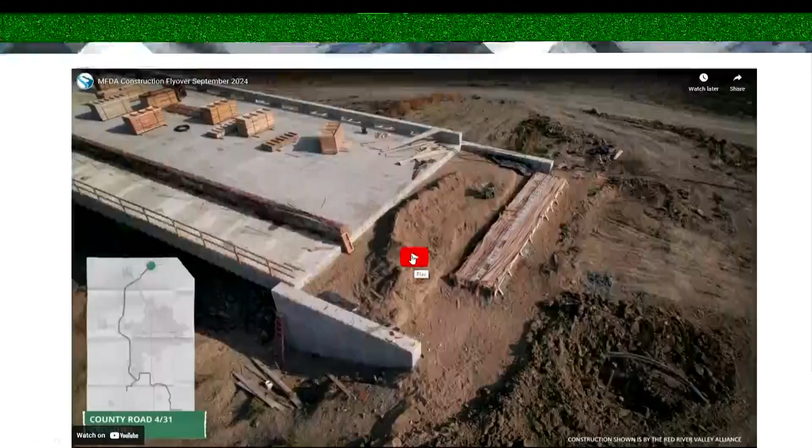One of the items we do on a monthly basis for our board presentation is a quick drone video update that gives a few-minute overview of the highlights of construction for the last month. Mayor, I hope you don't mind, but this is actually the presentation we'll show you guys tomorrow at our board meeting, so it's hot off the presses. This will be the first viewing of our drone update for September, giving a snapshot of some of the construction that's happened in the last month.

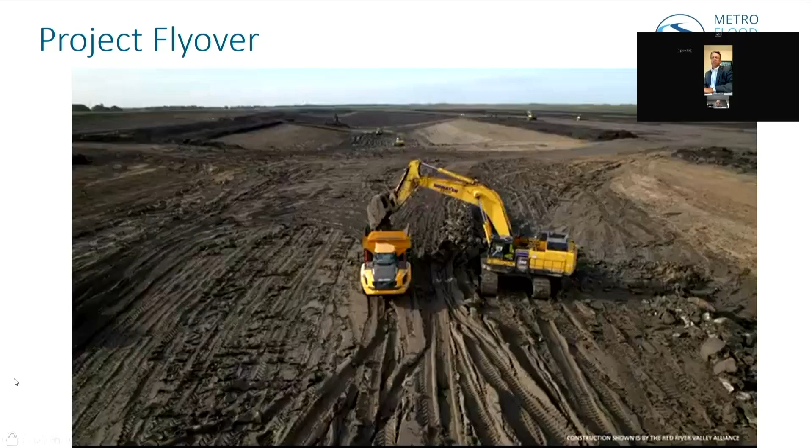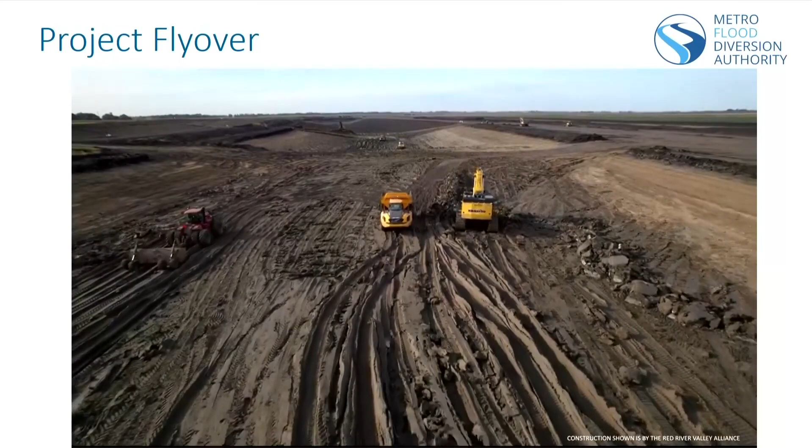Hi, I'm Tom Fuchs, the Senior Construction Manager for the Metro Flood Diversion Authority, with this month's project update. ASN Constructors' teams have continued to dig down to excavate the stormwater diversion channel while building up to construct the bridges that will cross over it.

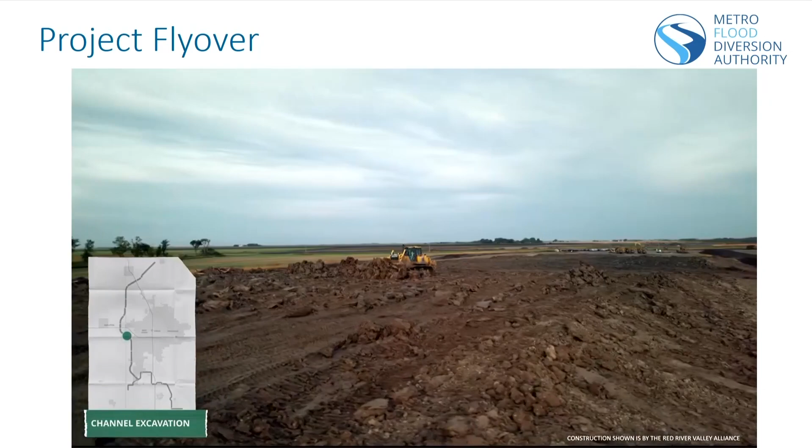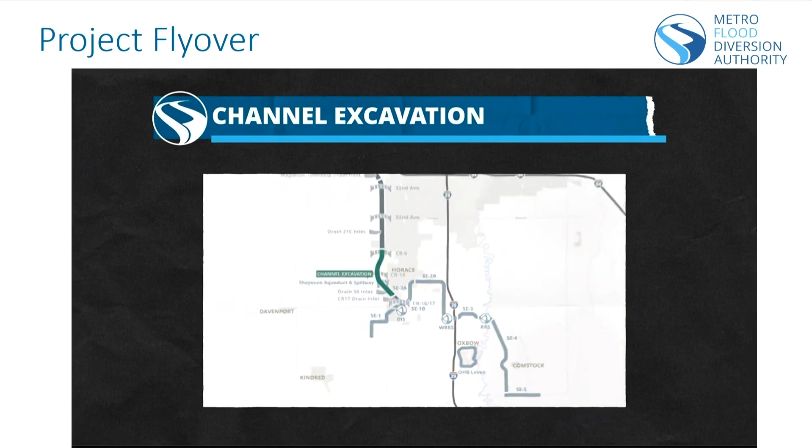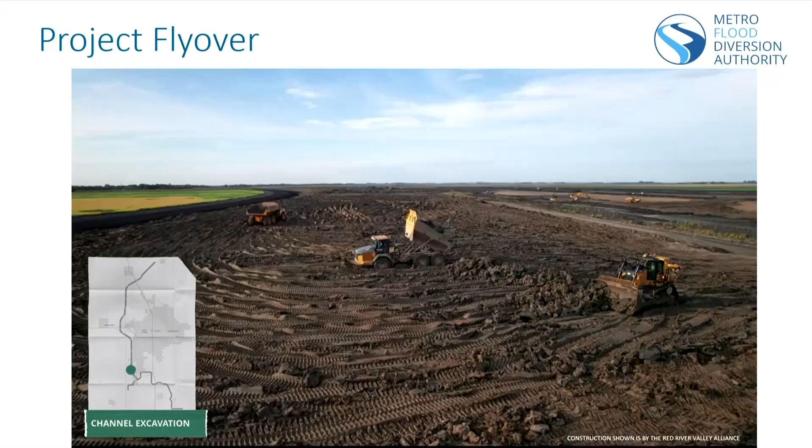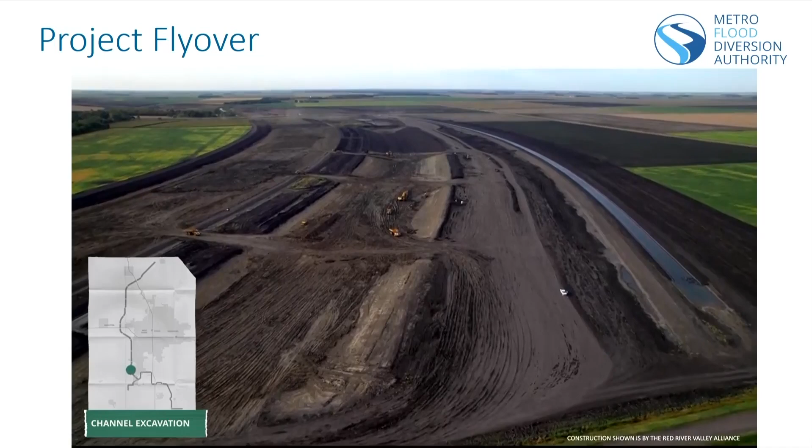In Reach 10, just south of I-94, crews are placing excavated material for the non-embedded levee, which must be constructed in warmer weather. Levee construction is also the focus in Reaches 11 and 12, further south. In Reach 13 of the channel, south and west of Horace, North Dakota, crews are digging the main channel and placing the excavated material berms on both sides. Close to another 2 million cubic yards of the necessary 45 million were moved in the past month, bringing channel excavation to about 57% completion.

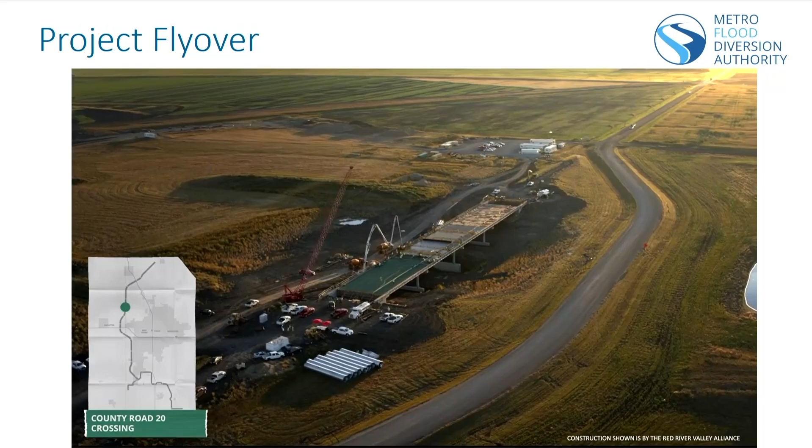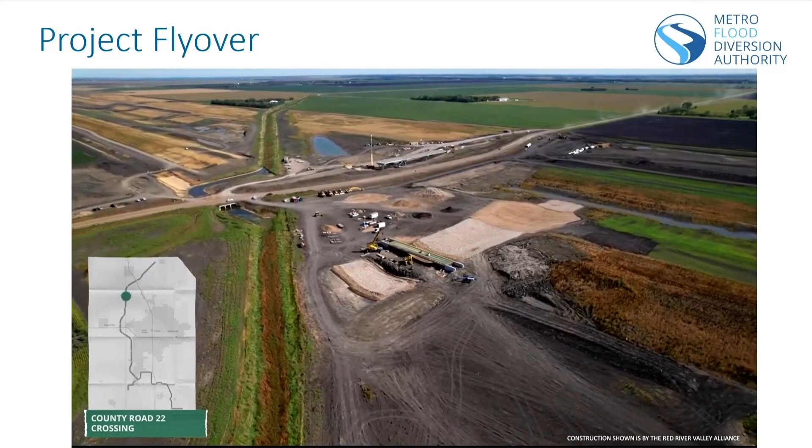Work also continues on many of the 19 channel crossings. At County Road 20, ASN Constructors started early to pour approximately 700 cubic yards of concrete needed for the bridge deck. North of there, at the County Road 22 crossing, bridge girders are now installed. Our drone view also captures nearby progress on the Maintenance Road Bridge crossing the lower Rush River inlet to the channel, which is one of several river and drain inlets under construction.

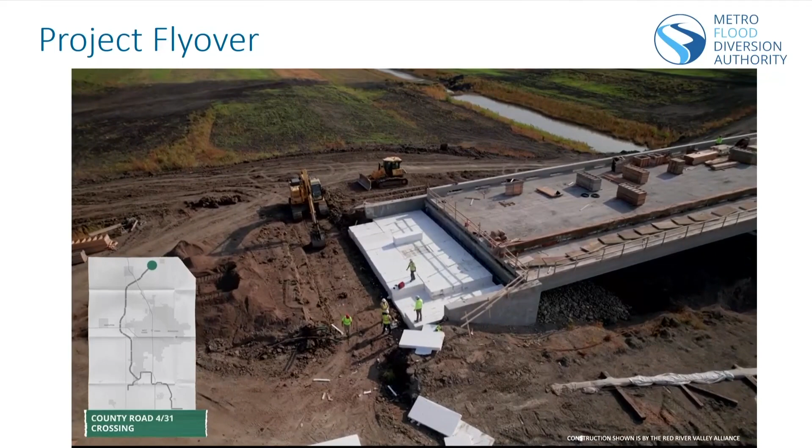Northeast of Argusville, North Dakota, near the diversion outlet, ASN Constructors is working toward completion of the combined County Road 4 and 31 crossing. Crews have now backfilled both abutments, including installing geofoam, a lightweight fill material that mitigates settlement, and they are beginning to construct the concrete approach slabs. Concrete bridge railings are also underway atop the bridge deck, which was placed last month. The new crossing is expected to open to traffic later this fall.

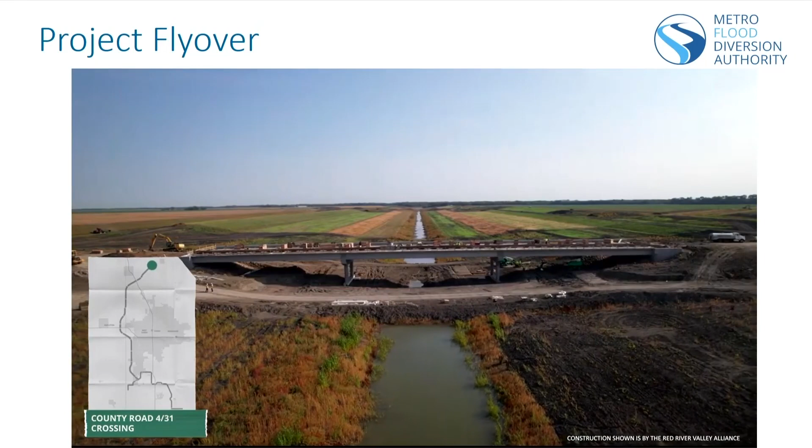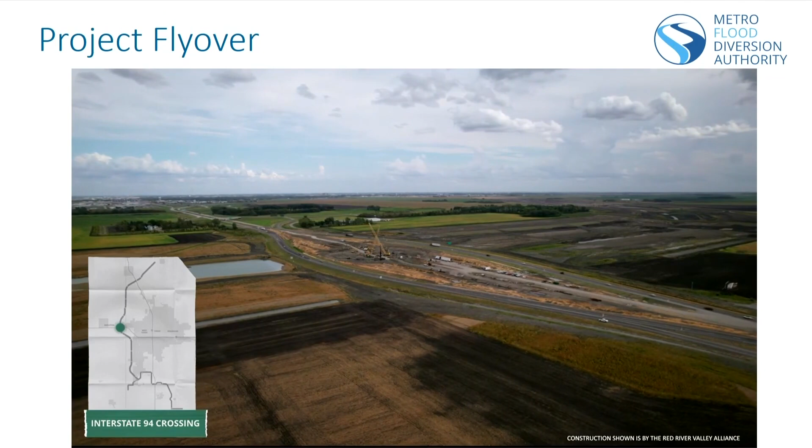West of the metro area on I-94, bypass lanes are now fully constructed and will be ready to open before winter. ASN has completed mainline pavement removal and constructed portions of the required grade raises for the new crossings. Crews also began driving H-piles as well as forming and placing concrete for the bridge's substructure elements this month.

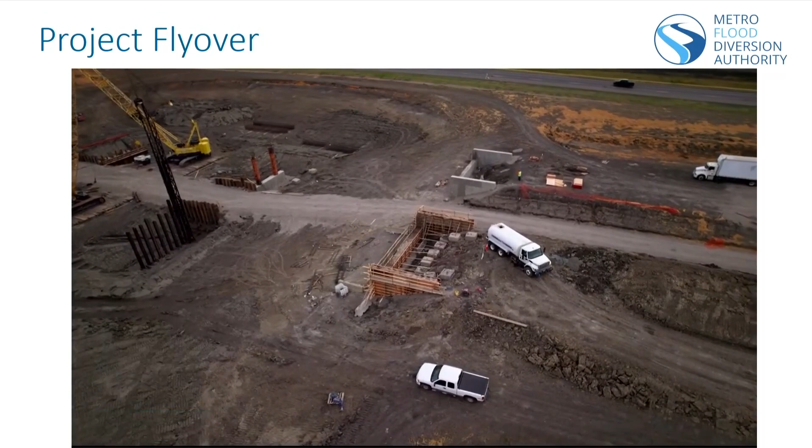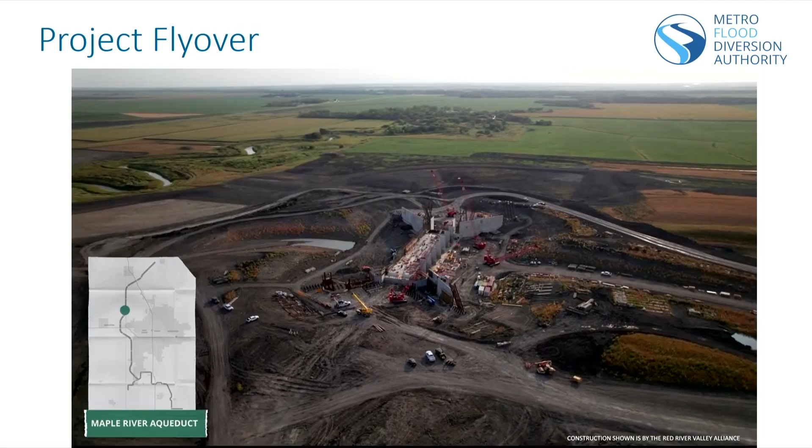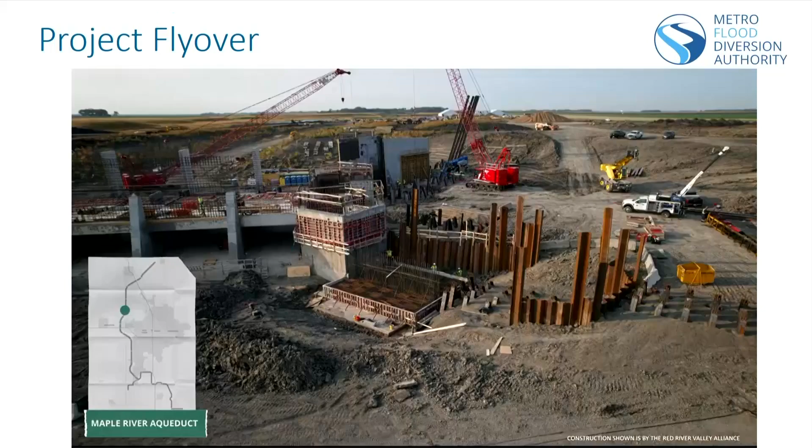Over at the Maple River Aqueduct, where the river, rather than cars, will cross over the channel, ASN has continued constructing segments of the concrete flume base and has begun formwork and concrete placement for the first portion of the north flume wall. H-pile installation and concrete work has continued at the adjacent wing walls surrounding the flume and conduit structure as well. To date, about 9,500 cubic yards of concrete have been placed at the aqueduct.

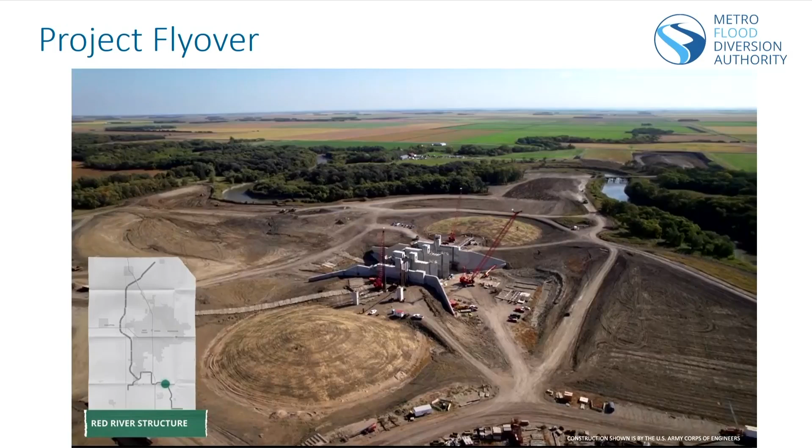At the Red River structure, Ames construction is nearing completion of concrete work for the control structure. The U.S. Army Corps of Engineers contractor also began driving sheet piles and H-piles as well as placing concrete at the flood walls east and west of the structure.

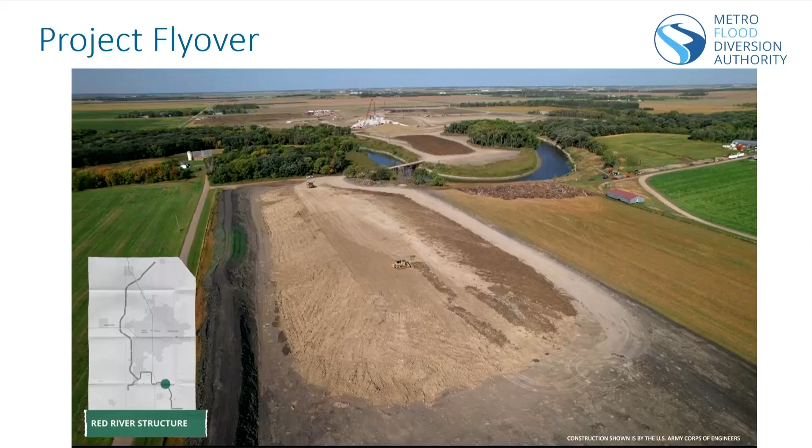Crews also began excavating and stockpiling roughly 460,000 cubic yards of impervious fill east of the Red River on the Minnesota side of the project. This material, which is enough to fill the U.S. Capitol dome more than 9 times, will be used to construct the embankment that will cross the Red River after the river is permanently diverted through the structure in 2025.

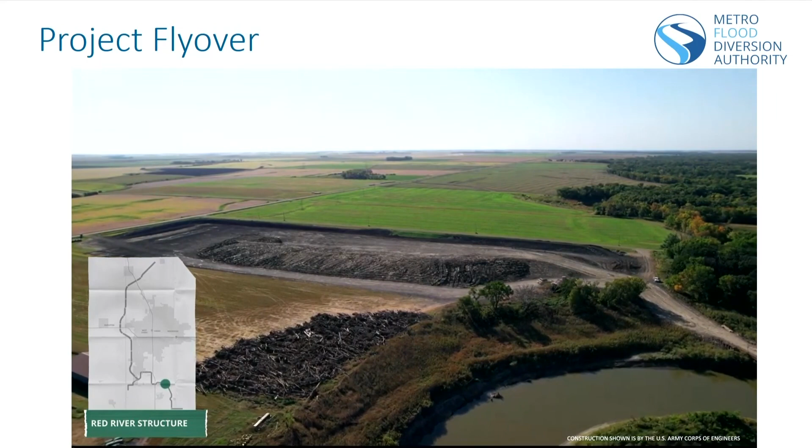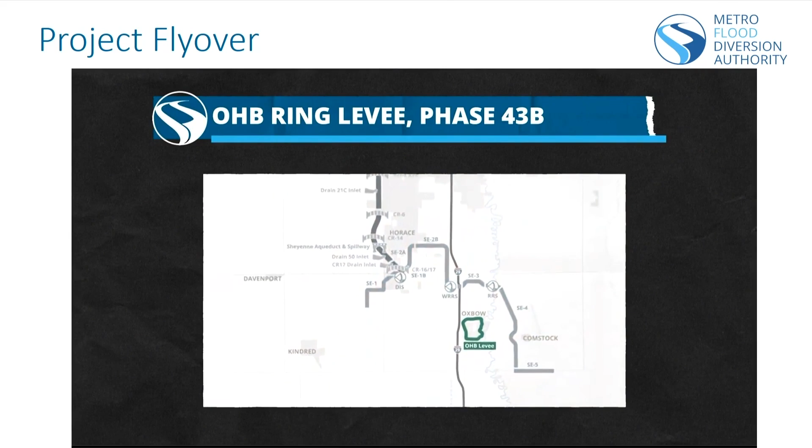A Corps contractor has also been working on the Oxbow-Hickson-Bocke ring levee. Hendrickson Transportation has completed more than a mile of the inspection trench. They've also completed about 3,000 of the 11,500-foot-long embankment using excavated material from the North Borrow Pond, one of 2 ponds that will be constructed as part of the project.

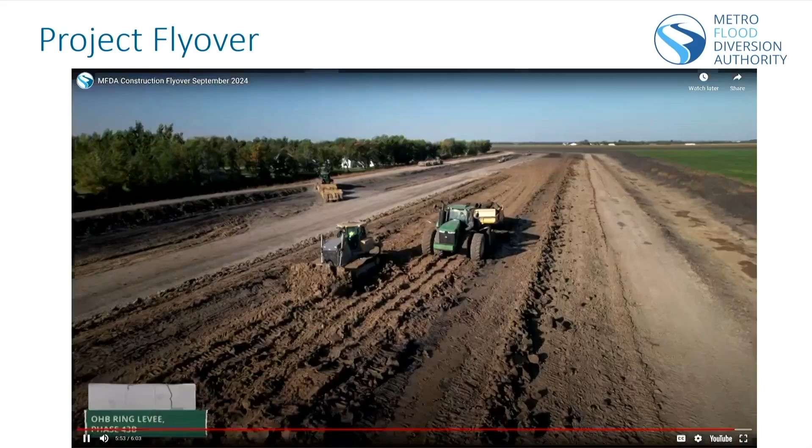So for those that are interested, that's a nice quick mini tour that we do every month ahead of our board meetings. With construction going 24/7, 365, we also have quite a bit of activity throughout the winter months as well, so always something new to show. We don't see every part of the project every month, but those are all posted on our website following our board meetings each month.

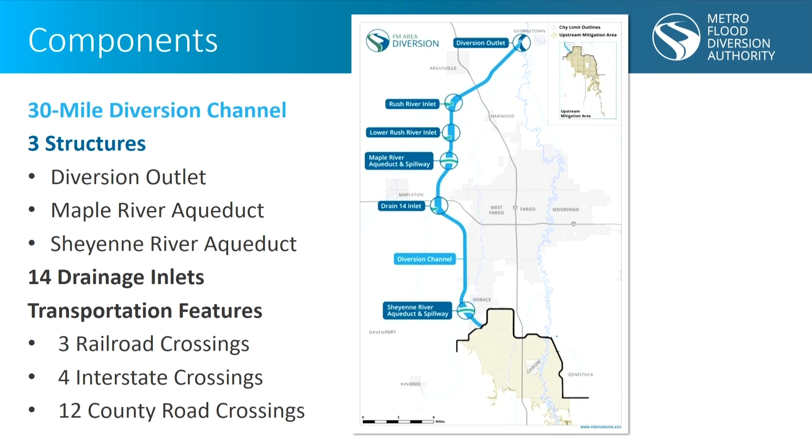Governor, I'm glad you got a chance to look at the very downstream end of the channel, because with 30 miles of construction right now, it's kind of tough to get everywhere in one quick trip. So we won't get all the way to the outlet today, but glad you got a chance to look at that. Again, we're making good progress on all of these features.

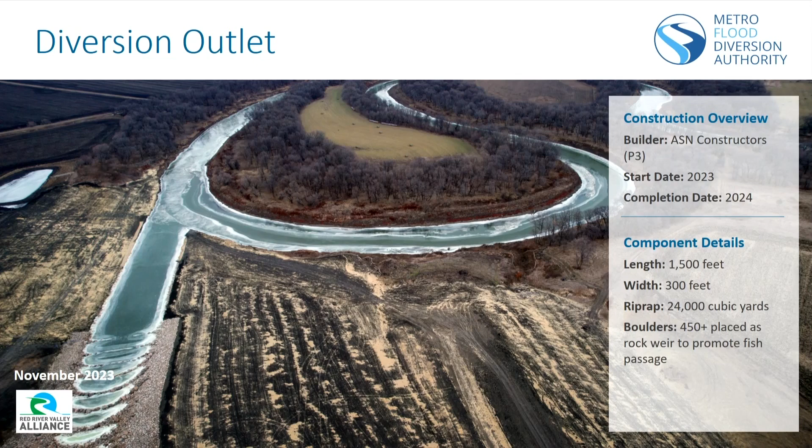This is a view of last fall, early winter of the diversion outlet. So we do have the outlet connected to the Red River, so the first couple miles of channel are functional. Once we get the 431 bridge open, we'll be able to open up the channel back to the interstate, BNSF and County Road 81 crossings as well, which will likely happen yet this fall.

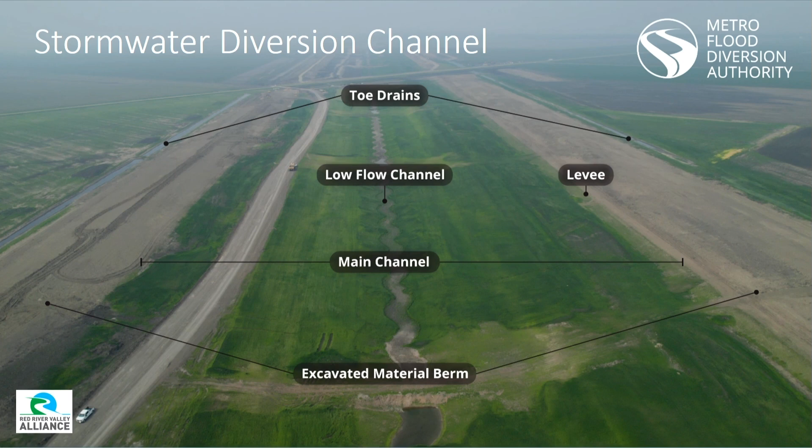Again, for the first several miles of the channel, we have a sinuous low flow channel to replicate for fish passage. Since we are dumping the lower Rush and Rush rivers directly into the diversion channel, we do have fish passage up through the Rush River and a structure being constructed on the Rush River to allow fish to climb back out into the main body of the Rush River as well.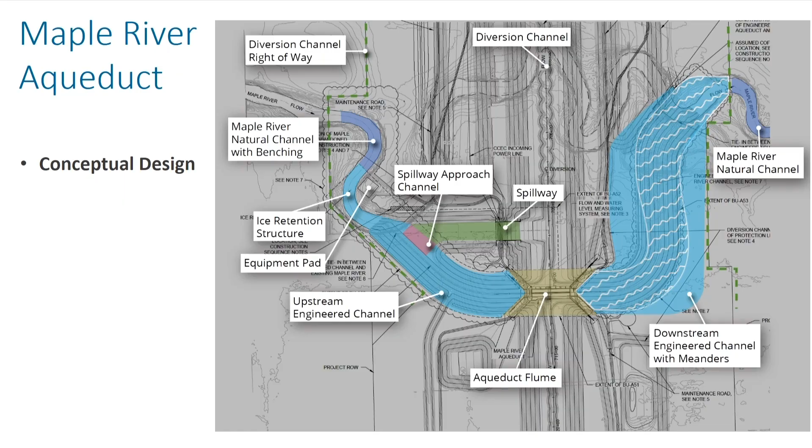So real quick, we're making probably the most progress on bridges this year. Our mild winter really helped advance that construction in a large way. So Governor, if you can order another winter like last year, that'd be really good for our construction.

Current schedule would be to have all of the bridges open next summer and fall. So we'll have transportation reconnected, and then they can continue with excavating the channel through those structures. On the south end, they're working on piling and preloads on bridges right now, advancing those pretty continually from north to south.

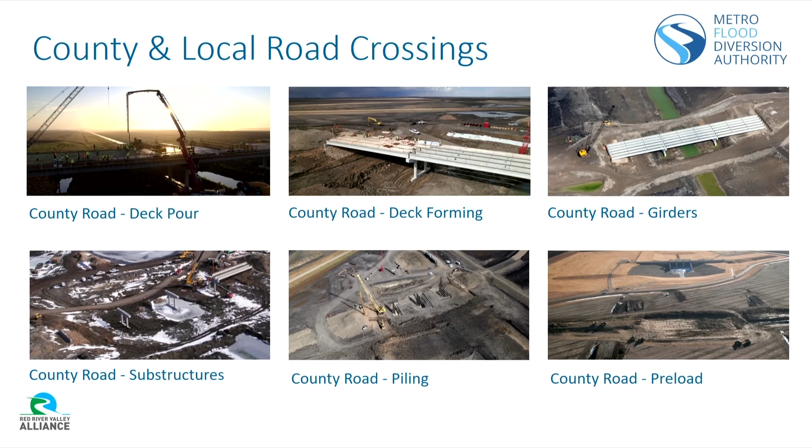Good progress is also being made on the interstate and railroad crossings. Interstate 29, you saw in the drone video, they've got girders set and are starting to work on decking on the first of the two bridges on I-29. Again, working on the substructures on the I-94 bridge.

They'll be setting girders on the first BNSF bridge here probably in the next few weeks, maybe 4 to 6 weeks, on the Prosper Bridge, and are also working on substructures on the Hillsboro crossing, and are working on embankment and grade raise for the KO crossing north of 94.

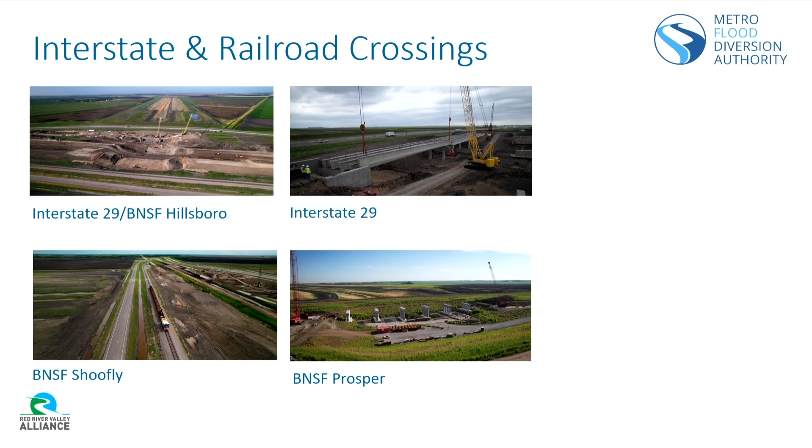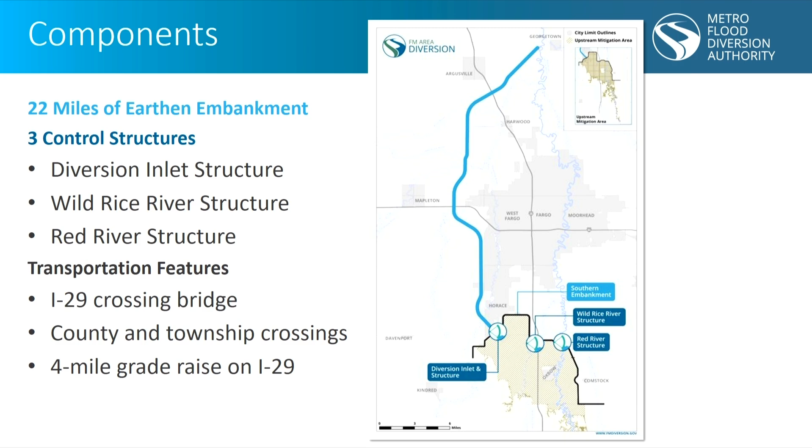So a real quick rundown on where we are with the southern embankment. This is the piece of the project being constructed using federal dollars by the U.S. Army Corps of Engineers. They have the three main control structures: the diversion inlet, the Red River structure, and the Wild Rice structure, along with about 22 miles of earth embankment to protect the metro area from water coming from the south. We'll stop at the diversion inlet structure site today.

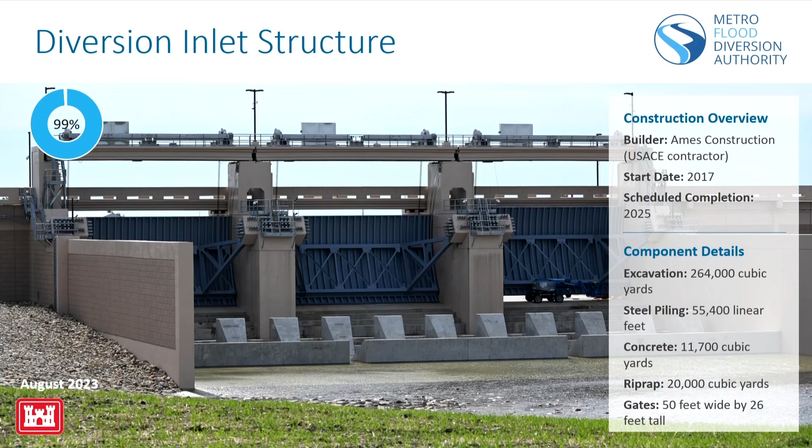This structure is virtually complete. They're waiting on some final gate equipment that we anticipate will be in and installed, along with the monitoring equipment for the USGS gauges. That should all be in place sometime mid next year. But when we stop there today, there's no active construction. They're just waiting on that equipment, and all the safety rails and everything's in place. So it looks like a very completed site, which it is, and it's nice to see a structure that's virtually done on the project.

The Wild Rice River structure is nearing that same point. They're working right now on the final pieces of catwalks, scaffolding and walkways, finishing up the bridge deck and the access roads, and that will be virtually complete here this fall, with the same schedule that by next spring they'll have that final gate equipment and USGS gauging station information and equipment installed as well.

We're not going to be able to stop at that site today. The access road is a little bit suspect, so we just haven't been taking buses in there yet as far as access. Then the Red River.

Chris, can you go back one on the wild rice? I think if I remember, in a couple of the big floods we had, multiple ones, but on one of those, I think when we were at 29 CFS, 29,000, almost half of that was coming down the wild rice, not the red. So just go a little deeper on this structure. Sure.

And because floods may materialize in different ways, and we're not always going to have that sort of 50-50 split between the wild rice and the red, but a little bit more about how this works, what the capacity is, and how we're feeling about the design of this piece.

Yeah, for sure. Thanks, Governor Burgum. The structures are set up, generally speaking, we have about a 60-40 to 70-30 split, with majority of the water coming from the red side of things. We have a lot of redundancy in our gates from a Corps design standpoint.

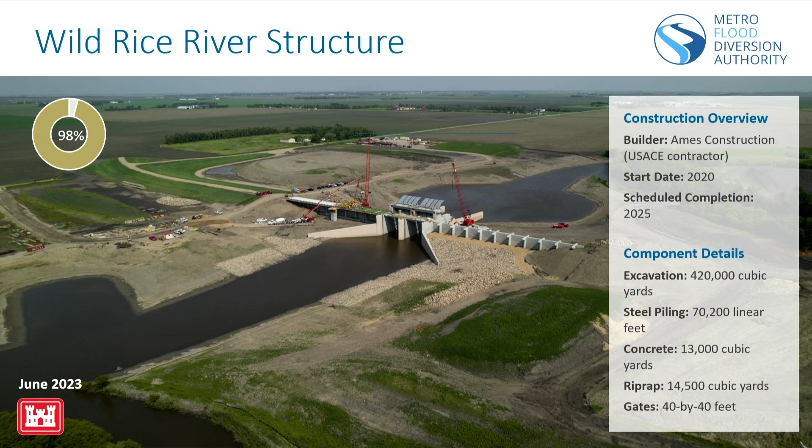So we'll swing through today. If we can squeeze enough time out of the trip, we'll squeeze in and take a quick look at the Red River structure. Again, this is about 60% complete.

The gates here, just to give you a quick rundown and some nerd stats: there are 3 gates, each 50 feet wide and a little over 50 feet tall. They weigh a little under 200,000 pounds each, so they're incredibly large gates.

We don't produce a lot of those around here, so there aren't any manufacturing facilities close by. They're making those down south and shipping them up in pieces. The orangish strips on the gate are where they welded it together in the field. They have a cribbing system where they put the gates together, weld it in place, then touch up and finalize the painting on site.

It's quite a unique system, as they're used to down in the southern parts of the country, putting them on a barge and floating them into place, since most of these are on active rivers or out in the middle of the country. They're using some pretty unique methods to get the gates shipped here, assembled on site, and set into place. It's quite a process to watch.

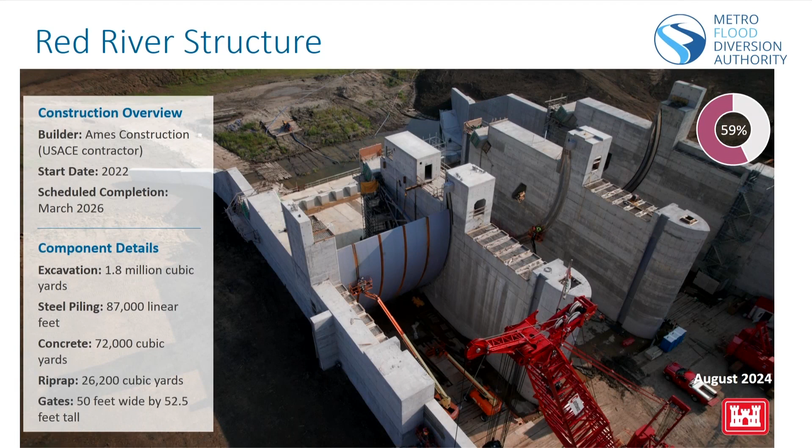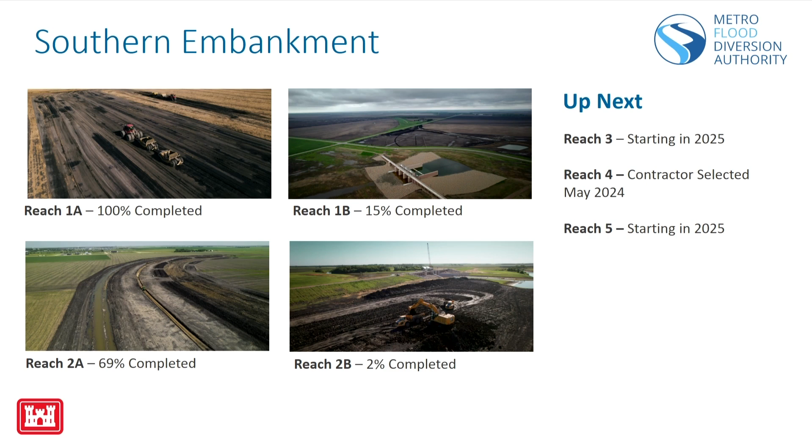There are several reaches of the southern embankment underway, and the last couple of reaches right now are in final design. I'll talk a little about that on the last slide to wrap up where we're headed in the next couple of years for the project.

One of the main projects, now virtually complete with just final punch list work remaining, is the grade raise on I-29. Those two structures are where the interior channel crosses underneath the interstate structures to let water pass between the interstate grade raise. We raised about 4 miles of interstate to make sure the interstate stays in operation south of Fargo as we operate the project.

That project is completely open and the interstate's back under normal operations. We're just finalizing the final punch list and a couple of warranty items, and that should be wrapped up this fall.

So real quick, I want to hit on, obviously, on a project. One other random question - I know we crossed the interstate like in your previous picture, also with the Sheyenne diversion. At a peak event, what would the role of the Sheyenne diversion be now that it's entirely inside this diversion? Is it still operational as part of an operational plan, or would flows never be high enough that it would kick out, or is the Sheyenne so narrow through West Fargo that it would still kick in with the flows being admitted?

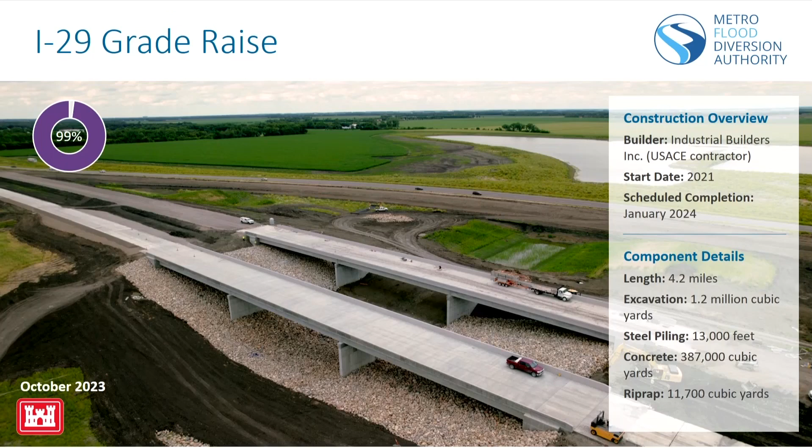Yeah, there will still be a flow split at both Horace and West Fargo where some water will flow through the Sheyenne and Horace diversion channels, though it won't be used as often or to the same magnitude. We're taking those peak flows from 4,000 to 5,000 CFS down to about 1,500, and that reduction is still a little more than the natural channel will handle. So we'll still deflect some flows into those channels, just much less than would happen today naturally.

A project this big involves quite a few mitigation projects. I want to highlight a couple we've completed to show that we're doing our mitigation alongside our other construction.

We've got a couple of wetland mitigation projects completed. One is we restored an oxbow that was part of the city of Oxbow, creating a wetland complex there. The topsoil areas you see in this picture were also reforested to reestablish the river riparian area.

This is another reason some of our Corps counterparts aren't here. Can you go back to that one? Would that be, the way we're looking at it, part of where some of the houses were bought out? Yes, and part of the original golf course.

Where the houses are now, there's a levee there? Yep. So this right here is now the levee - a piece of it built right into the edge of the golf course that protects the new part of Oxbow. So yes, this was part of both the houses and the golf course. I bet they found thousands of golf balls out there when they were excavating this - you could see little white dots everywhere when they were reestablishing this grade. So yeah, you're looking at that exactly right, Governor.

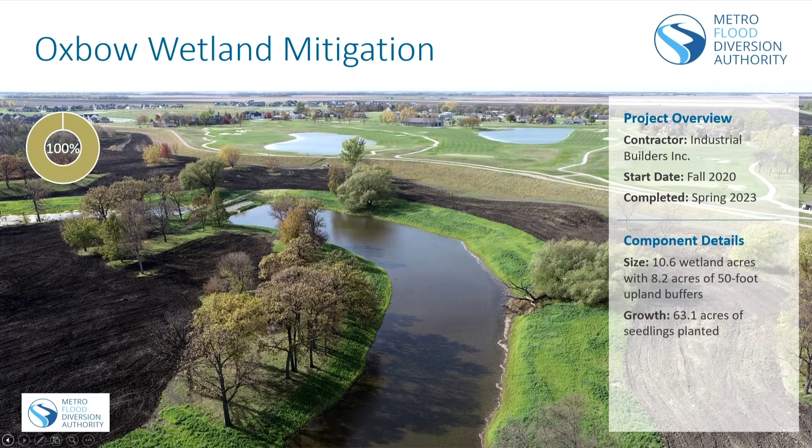And the lower left is Minnesota? Well, this right here is still North Dakota - this is just an oxbow. The river actually sits just off the screen behind us. Okay, yep.

One of the reasons our Corps partners aren't here today is they are doing a groundbreaking and opening ceremony for the Drayton Dam project. Most here have probably heard my spiel on this, so I won't go too in depth, but one of the mitigation projects we were asked to complete was to replace the last remaining low-head dam that hadn't been converted to rock riffles on the Red River system, here at Drayton. We were asked as part of our mitigation for the operation of the gates on the Red and Wild Rice River to complete that project. Corps of Engineers took that on, did a really nice job. That project was virtually completed last fall, and they just were doing final cleanup and some tree plantings this spring and summer. So they're doing a groundbreaking and ribbon cutting ceremony up there, probably happening in the next 15, 20 minutes.

Our state engineer is up there today for it. John's up there. I recall this is one of the criteria that the state of Minnesota put on their approval, it was a contingent thing. So for the legislators that weren't part of those negotiations all the way up at Drayton, Minnesota said you don't get a permit unless you do this that far downstream. I'll stop short of any editorial.

But there's a lot of excitement around this from the resource agency side. I've already gotten reports of finding fish that were tagged that have been traversing all the way from Lake Winnipeg through to the mouth of the Red River south of Fargo here. So I think there's good evidence that fish are moving. Not all of them move that far, but there's evidence that they're finding of the fish that are tagged in the river that are migrating quite a long distance and utilizing these structures to make their way to live their life and do their business.

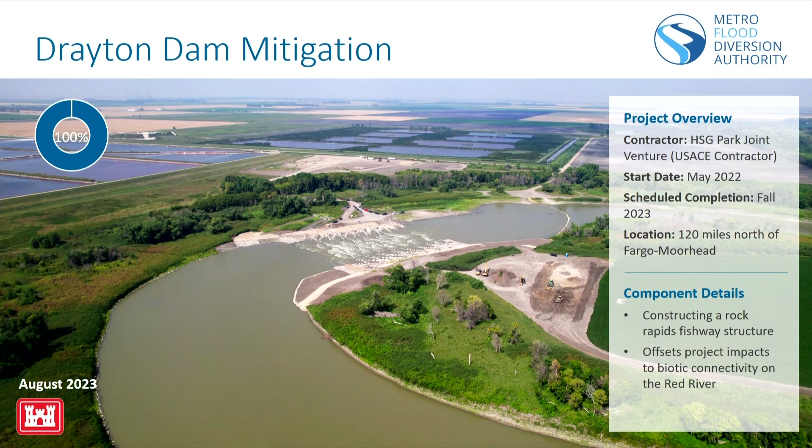Real quick on property acquisition, the Mayor hit on most of this as he was kicking off the meeting, and there's probably a few updates to this. I didn't grab it from the new board packet for this month, but we're virtually complete with construction footprint purchases. A couple of final eminent domain cases are moving their way through the court side of things, so we don't show those as complete yet. And then we're making good progress, a little over half done with acquiring the easements in the upstream storage area as well. So making nice progress on all of our land acquisitions for the project.

With that, I want to talk through a little bit, as a reminder on the easements, they get to keep the land. We pay them an initial easement payment, and then if there's a flood event, is there an additional payment?

No, there's not. We've got a few programs that we're putting in place. So yes, we're making an initial easement payment to purchase the property rights for both storing water and for removing development rights from the land that is in place. And then from an ongoing perspective, we're putting in play two crop insurance programs to help with the producer side to reduce their risk from an operational event. In addition to that, we have our debris cleanup and restoration projects that we would do following an event as well. So no direct payments to landowners, possibly some reimbursements if they do some of their own cleanup, but no direct payments for storage of water.

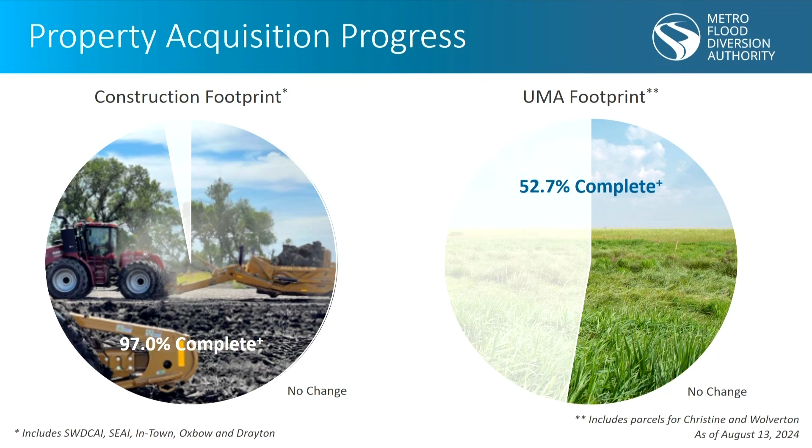I remember in the Senate Ag Committee, one of the questions that came up was weed control and who's responsible for that, because people are going to be building their budgets, and if it's a political subdivision versus the owner or tenant along there, there's a lot of ag people worried about thistles and all sorts of invasive species being transported north from land that's not theirs. So how does that work in terms of the responsibility of weed control?

Are you asking just on the general cropland or on the project footprint land or both? On the easement type, where right along there. Yeah, I'm not aware that there's any separate payments for weed control. I think that just stays with the producers to manage the weeds on the land.

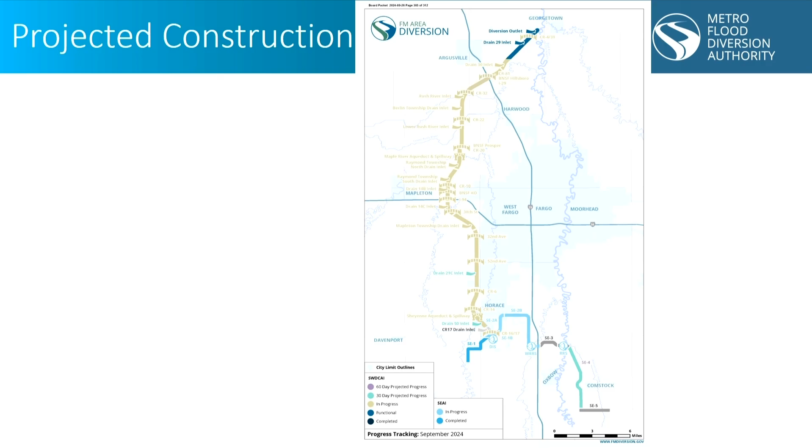So with that, that's all I had today, Governor. If there's other questions folks have, otherwise we can certainly cover some of those as we're driving through the project sites as well.

I hate to even think about this, but this is sort of the plan for the unthinkable. But if we were to have a large flood event in '25 or '26, some of this functionally completed work might be helpful. Have we done any scenario planning for where we might be, say, next year in terms of if we had an event—where we would be in trouble and where we would have some help from this work?

Yeah, we've looked at that a little bit, Governor, and without everything being completed, and especially without access to the channel, there's a limited amount of benefit we can get out of some of the features we're building. I think one of the biggest benefits we do have is we're almost 90% complete with all of our in-town work to protect the in-town to that 37-foot stage, which gets them protected practically up into that low 40s with very minimal sandbagging anymore. So we could certainly fight a flood event similar to what we had in 2009 in a much more manageable fashion today by having that work done. That was a lot of our objective of advancing that work early, getting the in-town parts protected so we could fight those moderate sized floods while working on getting the overall project completed.